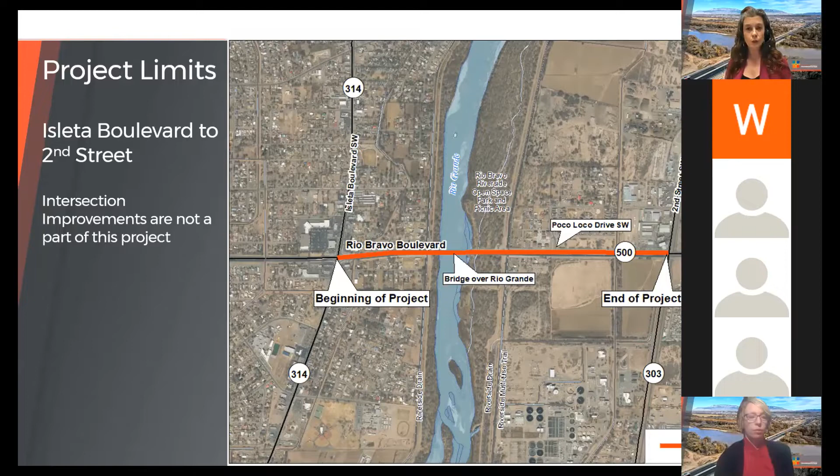The purpose of the project is to address the deficiencies of the aging bridge structure and improve travel along Rio Bravo Boulevard. The need arises because the eastbound bridge over the river is aged and in need of replacement. In addition, travel volume through the corridor is quite high, particularly during the evening and morning commutes.

There's also a need to look at traffic flow around the Poco Loco intersection, which is used as access for the riverside picnic and park areas. Additionally, the corridor's pedestrian and bicycle trails are not currently continuous, so part of our study looks at improving connectivity for recreational use as well as alternative commuting means.

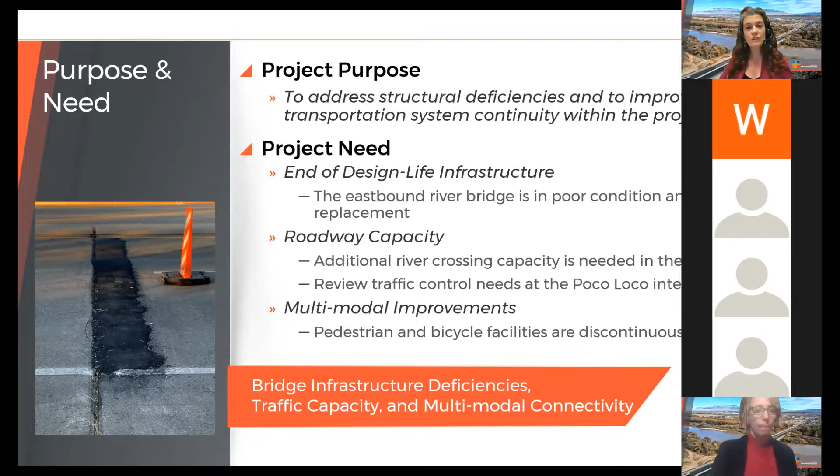Thank you, Jennifer, and hello everyone. Thanks for joining us this evening. As Jennifer mentioned, I will be discussing the emergency repair that occurred earlier this year.

Last year about this time, one of the NMDOT bridge inspectors discovered a bump on the bridge deck that led to an emergency inspection of the eastbound Rio Bravo over Rio Grande Bridge. It was discovered that the bridge pier was in need of immediate repairs. Traffic closures were put in place to remove loads from the bridge until the repair could occur.

During the repair, while work was occurring under the bridge, the eastbound bridge had to be closed to traffic completely because sections were lifted off the pier. Since this was an emergency situation, the project had to move forward as quickly as possible.

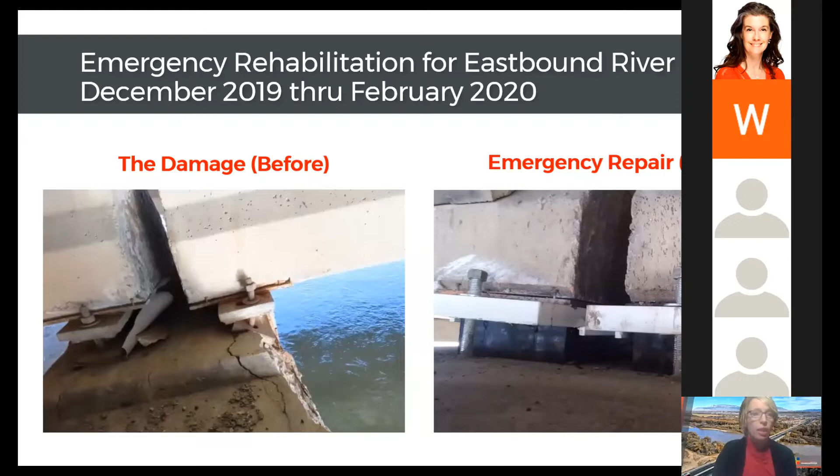In contrast to the emergency repair project, the upcoming project we are discussing here today had been in the planning stages since before the emergency. Funding had been programmed in the statewide transportation plan in early 2018. This project is not in response to an emergency or failure, but is being carried out to address the end of overall lifespan of the bridge.

We know that this is a critical river crossing for the area, and since we can plan for this project, maintaining traffic flow will be a key project consideration. You will see orange barrels and there will be traffic impacts, but we will not be closing the bridge for the entire duration of the construction project.

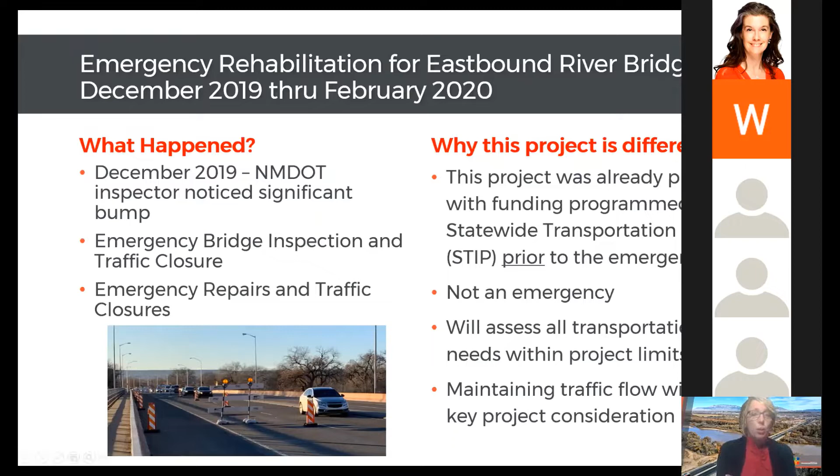We appreciate everyone's patience during the emergency repair and look forward to giving the public a new bridge to utilize for years to come. Now I'm going to hand this off to Megan Myers, the WSP project manager.

Within these project limits, there are several pieces of infrastructure that could be replaced or rehabilitated. First and foremost are the two parallel bridges which cross the Rio Grande. These bridges are about 1,400 feet long, with each bridge carrying one direction of traffic. Next are the Riverside Drain bridges, located about 50 feet to the east of the Rio Grande bridges along Rio Bravo, also with one bridge carrying each direction of traffic. Lastly, we have two culverts under Rio Bravo, just to the west of the Rio Grande bridges.

There's a corrugated metal pipe culvert that carries the Riverside Drain on the west side of the Rio Grande. And next to that, there is a concrete box culvert which spans an access path along the Riverside Drain.

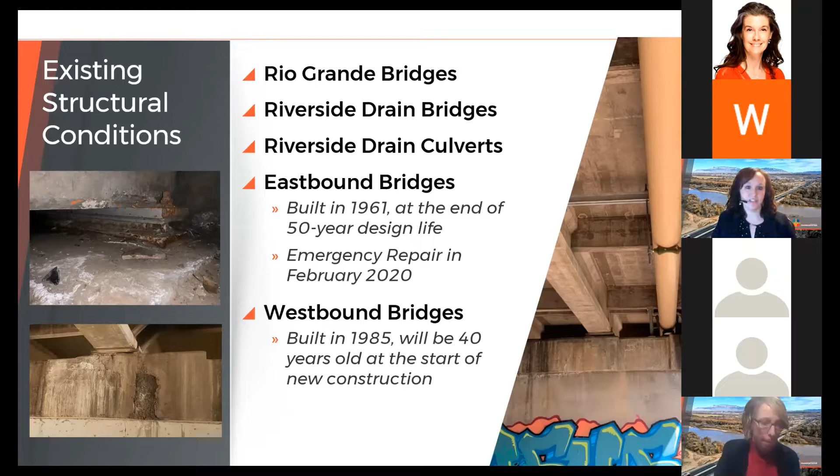The Rio Grande bridges were the main focus for this project initially, and particularly the eastbound bridge, which had the emergency repair that you just heard about. This bridge and the eastbound Riverside Drain bridge were built in 1961, meaning they are both at the end of their 50-year design life. The westbound Rio Grande Bridge and Riverside Drain Bridge were built in 1985 and will therefore be within 10 years of their design life at the time of construction for this project as well.

The existing roadway along the Rio Grande bridges consists of 4 12-foot lanes, 2 in each direction, a 6-foot wide raised median between directions of traffic, 10-foot shoulders on the outsides of the lanes, and a separated sidewalk along the southern side of the bridge.

The parallel bridges at this location almost appear as if they are one bridge, but they are separated by a small 1-inch wide joint.

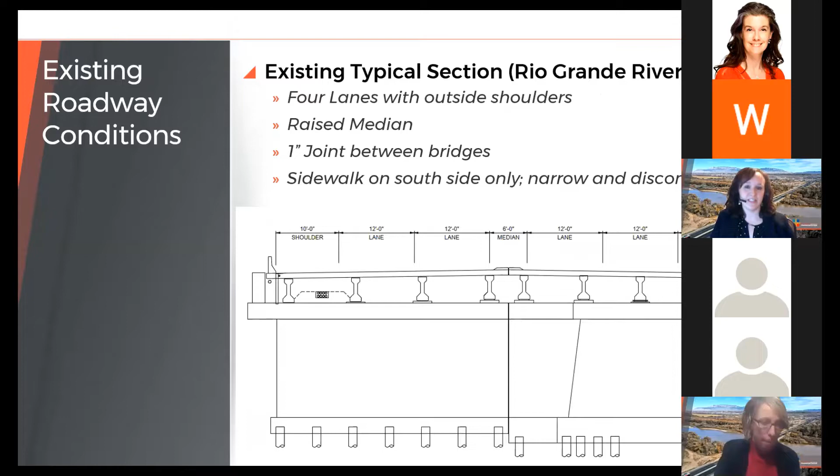In addition to the bridge and culvert crossings, there are several other aspects of this corridor that are being taken into account throughout the design and construction of this project. There are multiple utilities that cross the river and drains and are supported on the bridges. These include gas, fiber optic communications, electric, and water lines.

As I mentioned before, there are riverside drains that run parallel to the river on both the east and west sides. Also along the river are public recreational areas, including a picnic area, fishing pier, and trail along the east side of the river. And lastly, there is lighting along both sides of the bridges and the corridor, which will need to be maintained.

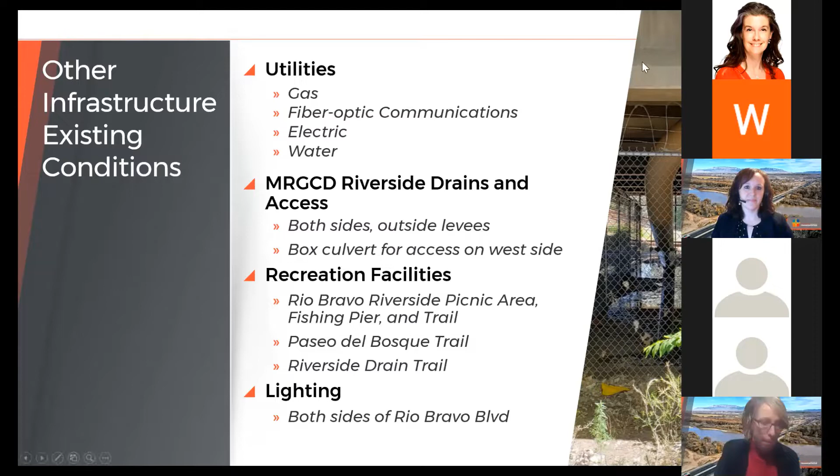River crossings in Albuquerque are obviously critical for transportation between the west and east sides of the city and county. Existing vehicular, pedestrian, and bicycle traffic within the project area are all important considerations. Currently, this river crossing serves more than 30,000 vehicles per day.

The NMDOT has improved Rio Bravo Boulevard from Prince Street to I-25, and Bernalillo County is in the process of improving the 2nd Street intersection to connect to those NMDOT improvements. This means the Rio Bravo corridor will be widened to 6 lanes from 2nd Street to I-25 to the east of the project we're discussing today.

This project is taking into consideration transportation needs from the Isleta intersection to the county's project at 2nd Street to provide continuity of travel and much needed river crossing capacity in the Rio Bravo corridor. To effectively maintain traffic during construction, the project team will be applying lessons learned from the emergency repair project to determine how traffic flow can be properly maintained during construction. We understand how important this will be to the surrounding community and the users of this corridor.

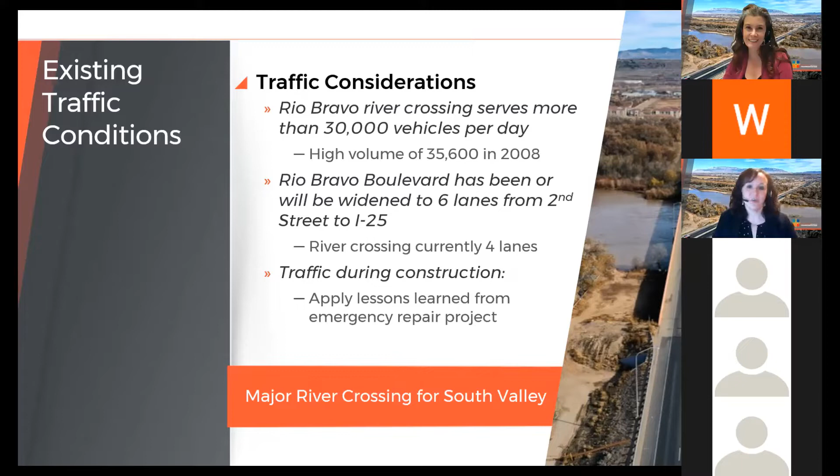In addition to vehicular traffic, there are several multimodal facilities within the project limits, some of which are substandard or not well connected, and some of which could be improved with this project. The Paseo del Bosque Trail on the east side of the river is used by bicyclists and pedestrians, but our data shows that most trail users biking or hiking south on this trail turn around when reaching the north side of Rio Bravo, and only about 10% continue south under Rio Bravo.

There is a proposed trail along the Atrisco Riverside Drain on the west side of the river, and this project will need to accommodate that underpass crossing as well. As mentioned before, there is a narrow sidewalk along the south side of the bridges, which does not currently connect to any sidewalk along the approach roadway. And there is a trail on the south side of the corridor from Dean Drive to 2nd Street, which continues east to I-25. Lastly, existing shoulders on Rio Bravo are sometimes used for bicycle travel.

The current conditions of the Poco Loco Dean Drive intersection with Rio Bravo will also be investigated as part of this project to determine if there is a need for additional controls, which could possibly include a traffic signal.

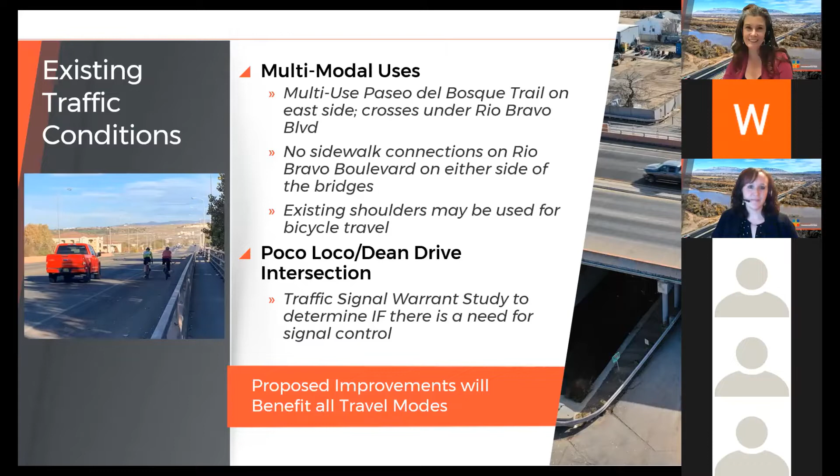The existing Rio Grande floodplain conditions are obviously a huge governing factor in the design of this project. One of the strictest requirements the project team is working under is the need to maintain the water level within the river after the new or rehabilitated bridges have been constructed. No permanent rise in the water level caused by this construction is allowed in this stretch of the river.

Running along both sides of the river is a levee system maintained by the Army Corps of Engineers. The design requirements for this levee system will be thoroughly reviewed as part of the study and design process to assure that the project designs do not compromise the levees in this area. Also, the proposed bridge components in and over the water will be designed so that impacts to the open water channel are minimized.

Throughout the study and design of this project, coordination with regulatory agencies and other stakeholders will be critical to assuring all parties' interests and assets are being considered. The agencies we are coordinating with include the Army Corps of Engineers, MRGCD, the Bureau of Reclamation, Bernalillo County, Interstate Stream Commission, and the U.S. Fish and Wildlife Service.

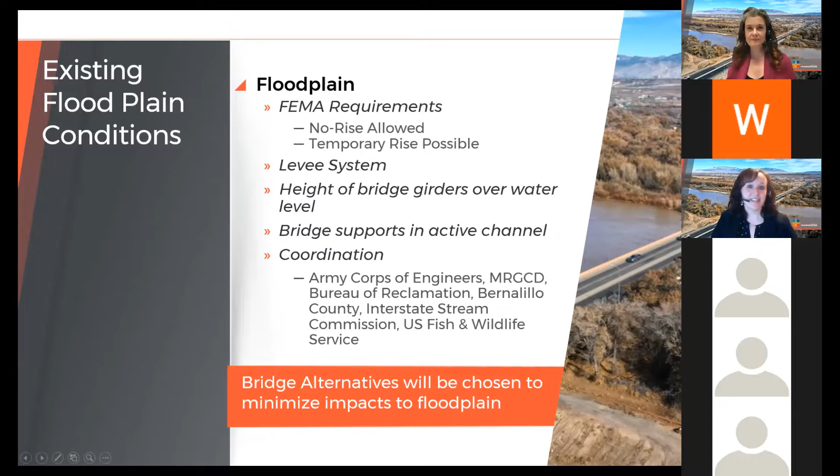Thank you, Megan. As Megan mentioned, we have been coordinating with multiple agencies and stakeholders who manage resources and land in and around the road and bridge corridor. Part of that coordination has included understanding what environmental resources and considerations that we should be aware of as part of the New Mexico 500 Rio Bravo Bridges Replacement Study. Using that information will help us find a solution that minimizes its impact on the human and natural environment as much as possible.

For this particular project, the environmental considerations and resources in and around the area include threatened and endangered species and those associated habitats, bat roosting and nesting birds, water resources including the Rio Grande, the floodplain that Megan talked about, as well as the irrigation ditches, cultural resources, existing noise levels and how noise levels may change as a result of the project and those associated potential impacts, visual resources, as well as potential impacts on recreation facilities, including the Riverside Recreational Park, as well as the associated trails.

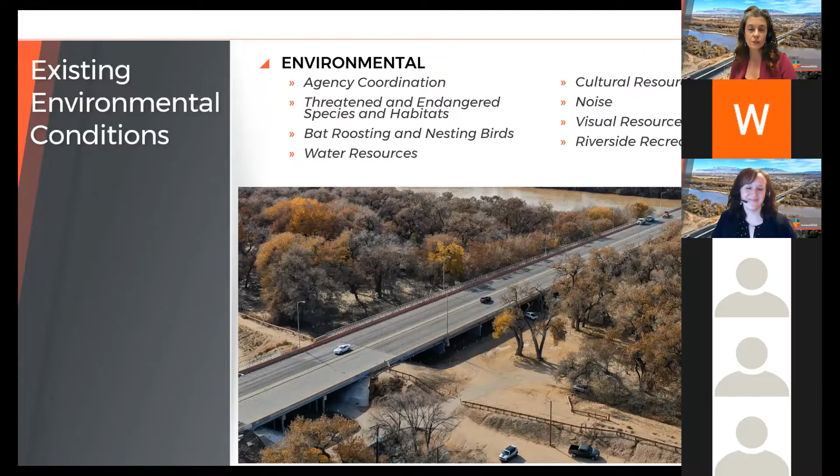Currently, environmental studies are underway as part of our study process, and the design will seek to minimize impacts to these environmental resources as we move forward with the study. Next, I'm going to introduce you to the NMDOT project development process and the project schedule.

Currently, we're in the early stages of the project. We're in the study phase. It's very early on. The NMDOT calls that stage phase 1AB. During the 1AB study phase, the DOT establishes why we are planning on making improvements and why they're needed. Understanding and gathering that data so that way solutions and potential solutions can be developed and identified to then look to see how those different solutions may be affected by the existing conditions within the corridor.

As part of that study process, it includes us talking to the public and the area stakeholders to get that input and to share our information to help us continue developing the project. As the study progresses, we end up developing a variety of different alternatives that are then evaluated, and eventually the goal is to arrive at a preferred alternative that advances into the environmental processing and into the preliminary design, which eventually will then be that preferred alternative that becomes that which is constructed.

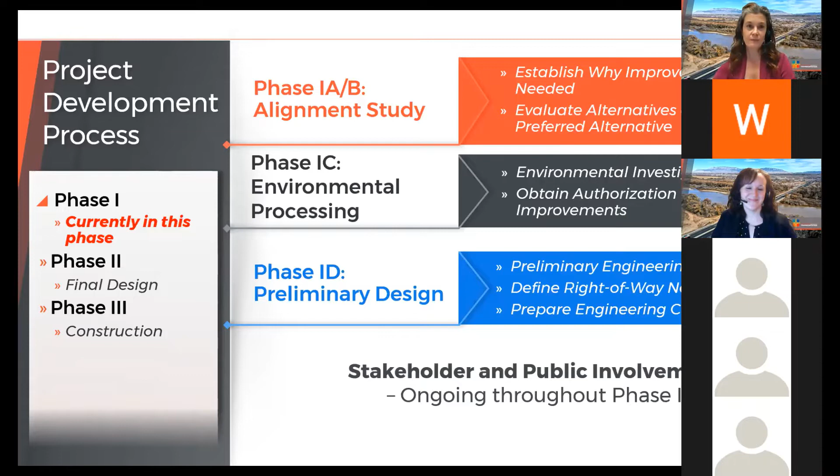As part of the study phase, we collect a variety of different data to understand how those different factors and features within the corridor can affect and constrain the development of alternatives. We look at right-of-way needs, environmental considerations, community concerns, available funding, agency input, traffic access, and geotechnical constraints. That range of factors allows NMDOT to develop a solution that is balanced and meets the project purpose and need.

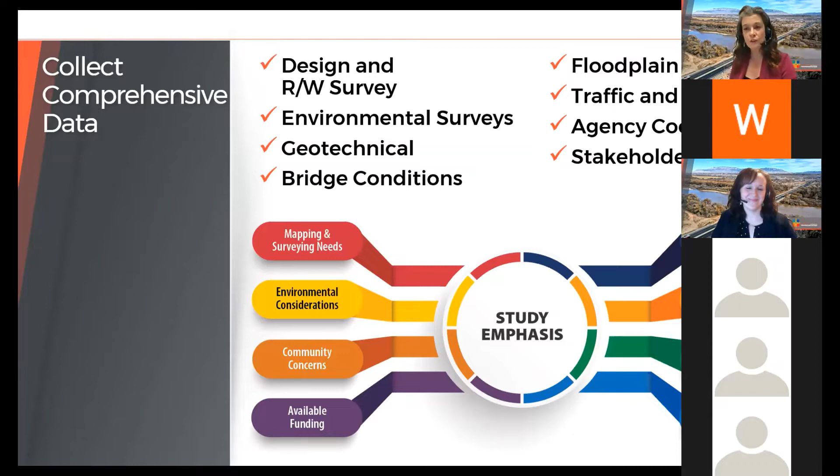Next, I will talk about the schedule for the project. We started this study earlier this year in the spring of 2020. We've continued to collect data on existing conditions and develop some conceptual plans, which is what we're presenting to you this evening. We're having the public meeting with you now, and we will be seeking to gather input from the community this evening and after tonight's event. We hope you send us your questions and comments. This will help us advance the project, as we are planning on completing the study in spring of 2021.

Once we wrap up the study, we will have a preferred alternative that will move into initial engineering design development, environmental analysis, and documentation. Right now, we're figuring roughly 2 to 3 years to finalize the engineering design before we get ready to go to construction. Construction is currently programmed for 2024.

However, as we move forward with the study and the project, the district will look at other funding opportunities that may allow the project to advance to construction sooner. Right now, there's over $25 million allotted from the Federal Highway Administration for this project, and DOT will be looking to add more money to make it successful.

First, this project will provide additional traffic capacity within the project limits. ADA accessible sidewalks will also be provided, as will pedestrian continuity not currently available at this location. The bridges will either be rehabilitated or replaced to bring them up to code and improve safety. Improvements to trail access will be incorporated, as will accommodations for bicycles. Lastly, overall connectivity to adjacent roads around the project area will be maintained or improved to provide a smooth traveling experience for users of this corridor.

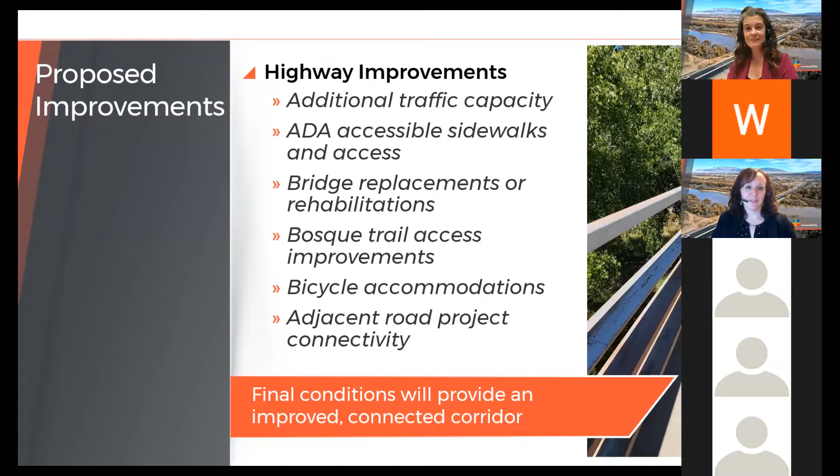The final width of the reconstructed bridges and approach roadway will be wide enough to accommodate 3 lanes of traffic in each direction, though initially the corridor may still be striped to maintain the current 4-lane configuration until widening to 6 lanes along the entire corridor is possible. We are expecting to provide a raised median similar to the existing one, and outside shoulders will be maintained as well. In addition to a widened sidewalk along the south side of the bridges, the possibility of providing a sidewalk on the north side will be investigated.

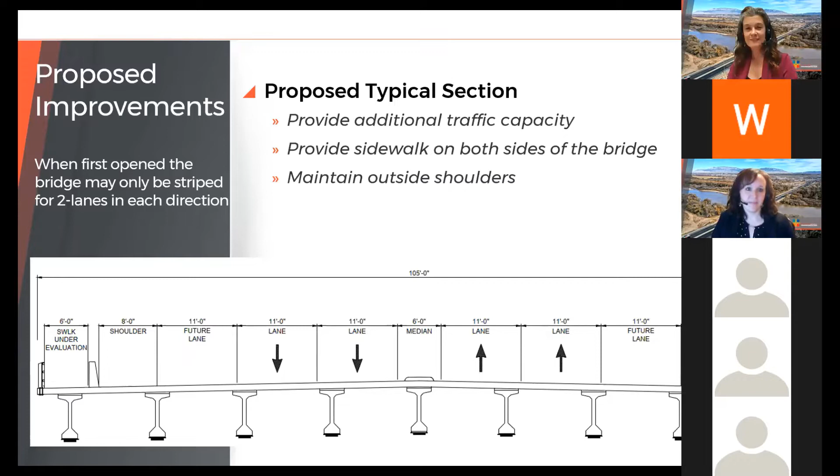And now I will pass things off to Nathaniel Miller with WSP to discuss the bridge alignment alternatives being evaluated as part of this project.

Thank you, Megan, and hello everyone. My name is Nathaniel Miller, and I'm one of the project engineers working on this study. I'm going to walk us through the alignment alternatives we're currently considering, and then I'll go through how we compare these alignments against each other to identify the preferred alternative.

As Jennifer alluded to before, we're just in the study phase. The most critical end result of the study phase is to identify the alignment that we'll use in final design. The way this works is you first develop a bunch of alignments, and really you throw them against the wall and see what sticks.

Some of the ideas you weed out as having fatal issues, and the rest you flesh out until you understand the impacts of each, and then you compare them against each other.

In a study, one of the options you're required to consider is actually doing nothing, which we call the no-build alternative. You do this to have a reference point to compare other alternatives against, but also in some ways to justify the project. For this project, doing nothing is not acceptable. The eastbound bridge required that emergency repair in the winter and is nearly 60 years old on a 50-year design life, so doing nothing is not acceptable.

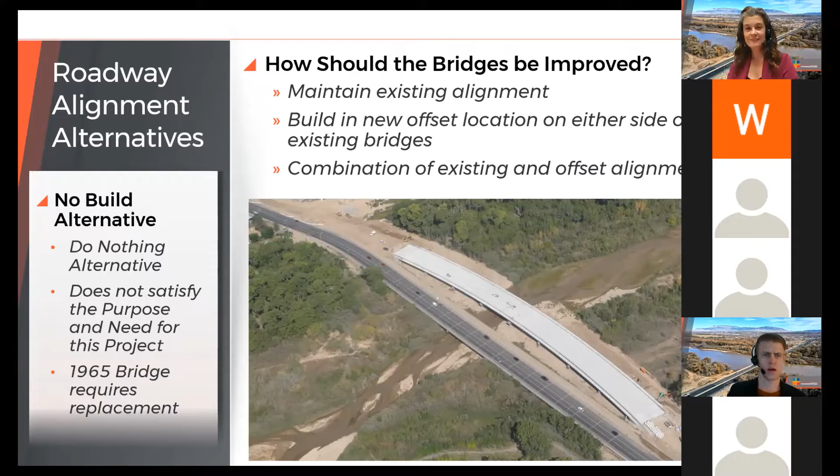Now I'll go through the alignments. Again, the project is from Isleta all the way to 2nd Street, but the alignment alternatives are the same along the roadway, except at the bridge location, which is where they differ. Most of the project complexity and expense is at the bridges, which is where we'll focus now.

We have several alternatives that we'll present. The first several are alignments that would reuse the existing alignment, alternatives 1 and 2. These may seem like the most obvious solutions, just put the bridge back where it is today, but actually they introduce the most complexity and cost, as we'll see in a minute. The second group of alternatives are brand new alignments, and we also have alignments that are partially offset from existing. And again, we want to emphasize every alignment has phasing to maintain traffic during construction.

So alternative 1 would only replace the eastbound bridge, which is to the south and in the hatch on this picture. This is the only bridge that definitely requires replacement at this time. The complication with this option is the strict floodplain requirements that Megan referenced.

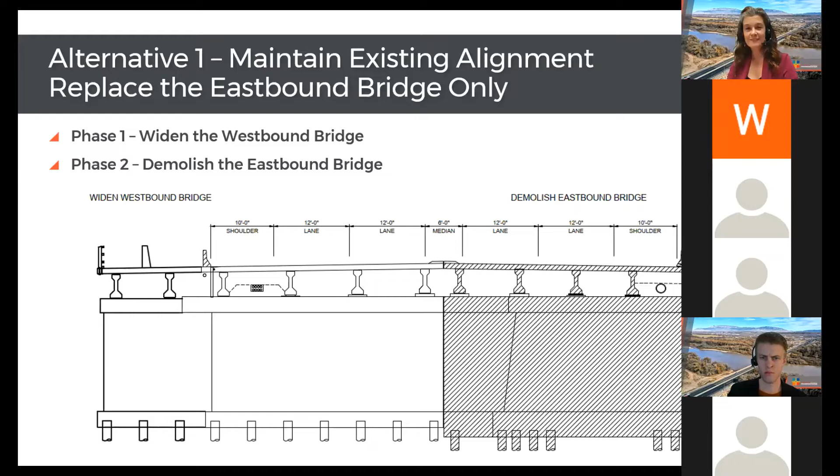Because of these requirements, we would have to line up the proposed replacement piers with the existing piers, which will remain in place. The existing bridges are built on a very large number of steel elements, which are buried in the river, and replacing the piers in the same location would introduce significant complexity and geometric constraints in avoiding this huge number of elements in the river.

Additionally, this option would leave the westbound bridge in place, which is 40 years old at the time of this new construction. So in another 15 or 20 years, this bridge would still require its own replacement project and result in a long-term cost noticeably higher than if we just replace all the bridges with this first project.

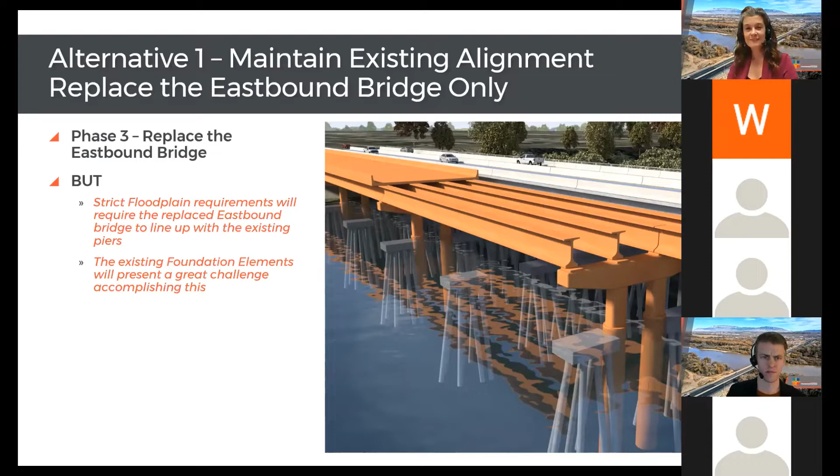The remaining alternatives all replace all the bridges with this one project, which would eliminate those foundation issues by allowing us to put piers in new locations.

Alternative 2 would put the bridges back in the same alignment. The disadvantage of this option is that it requires the most construction and traffic phasing of any alternative in order to put the alignment back where it is today, while maintaining traffic. As a result, we expect this to be the most expensive of our alignment alternatives and have the longest construction duration.

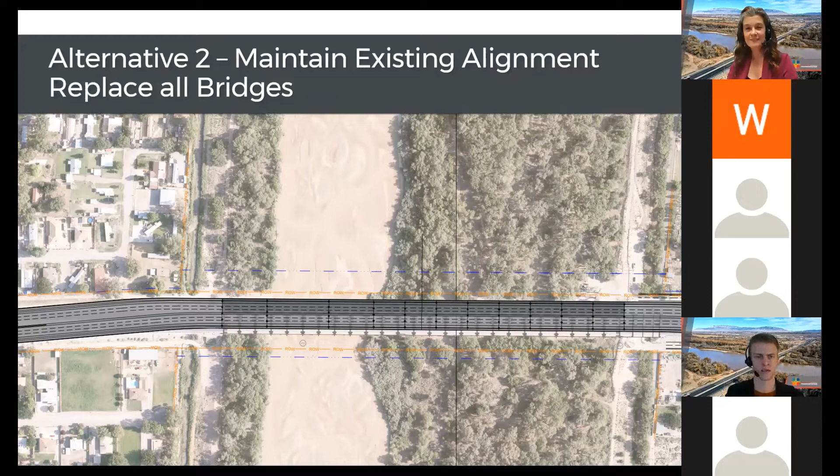The next two alignments are both new alignments. Alternative 3 is a new alignment to the north. The advantage of a new alignment is you can construct the entire bridge first before you really start impacting existing traffic. That separated construction is also very good for the contractor. It allows them to very efficiently construct the new bridge without a lot of phasing or needing to cycle in workers and equipment over and over.

Because of this efficiency, we actually expect this to be the least expensive alternative, to have the shortest construction duration, and be one of the best options for maintaining traffic and minimizing disruptions during construction. The disadvantage of this option is that it has the largest property impacts to the north and the most impact to the bosque habitat and the Rio Bravo picnic area.

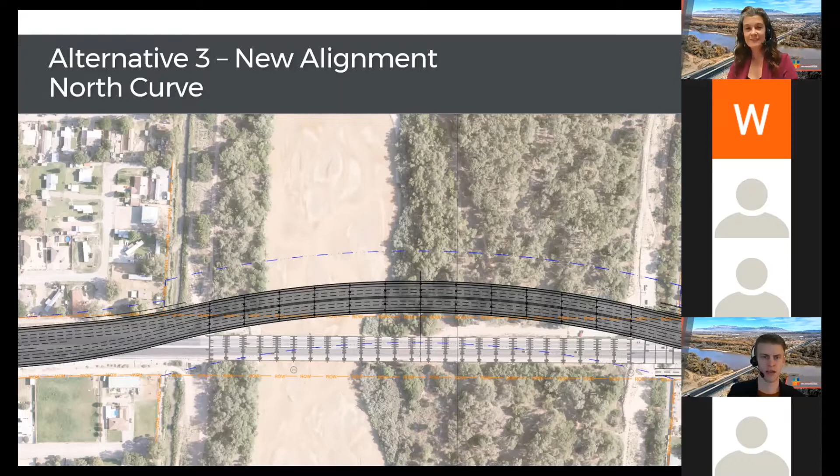Alternative 4 is also a new alignment, but it balances the disadvantage of alternative 3 by splitting the traffic on new bridges to the north and to the south. The result is that we have lesser total impact to the north, but now we have property and environmental impacts on both the north and the south.

This alternative has most of the advantages of alternative 3 with separated construction, but it also has a few major disadvantages. And the biggest one is that the existing bridge would have to be demolished after the new bridges have been constructed and boxed in that old bridge. This would result in a lot of added complexity and undesirable traffic situations. So the last three alignments that we're going to go through balance the pros and cons of the last alternatives.

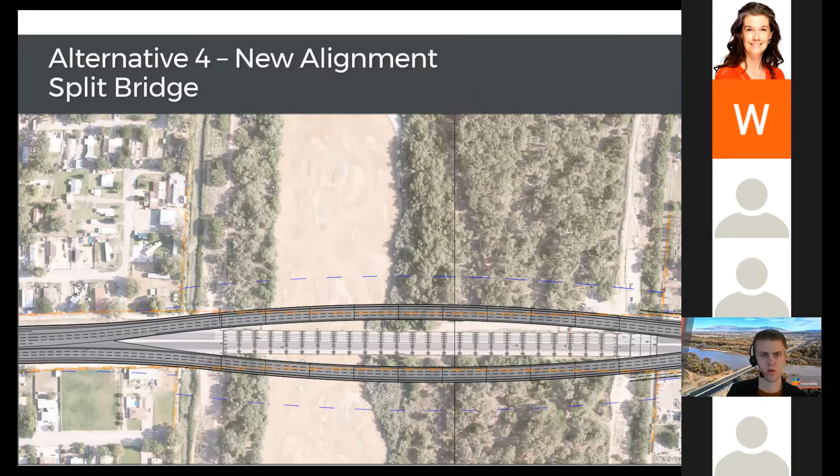They balance the pros and cons of using the existing alignment or going with a brand new alignment. All of these next alternatives build half a bridge first to the side of the existing alignment. We would then move traffic to this new half bridge, demolish the old bridge, and then widen the new bridge to its final condition.

Alternative 5 would place this partially offset alignment to the north. Alternative 6 would also place it to the north, but on a straight alignment, which changes where your impacts are. A curved alignment reduces the impact to adjacent properties, but a straight alignment reduces the environmental impact and reduces construction complexity by providing a straight bridge, which is simpler to build.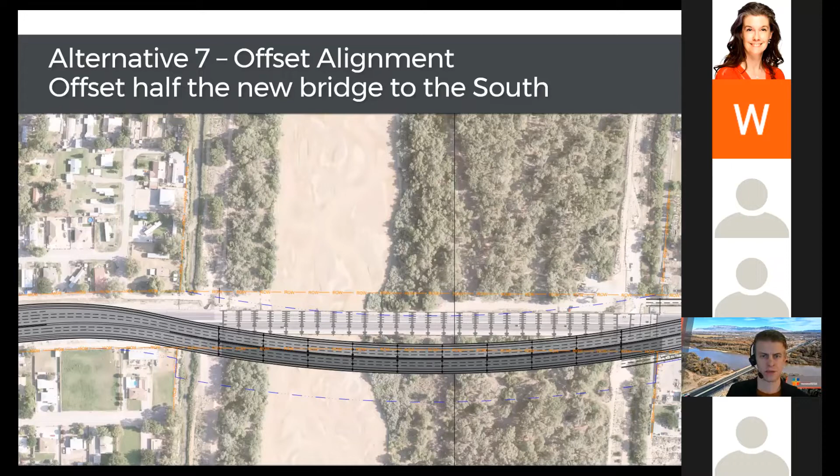Our last alternative, alternative 7, curves to the south, which greatly reduces impacts to the Rio Bravo picnic area, which is to the north. But the alignment has worse geometry curving to the south, and there is worse construction access for this option, particularly at the southwest corner. So those are the options. That's what we're currently considering. That's where we are today.

Now I'm going to briefly go over how we're comparing these alternatives against each other to identify the preferred alignment that we take to final design.

The list here are the criteria that we are currently using to evaluate the alternatives. We consider how each alignment impacts each one of these considerations, including construction cost, how constructible each is, the environmental impacts, the impacts to properties, how each alignment is able to maintain traffic during construction, how it impacts utility phasing, pedestrians and bicyclists, the river, and the ability to maintain the bridges in the future.

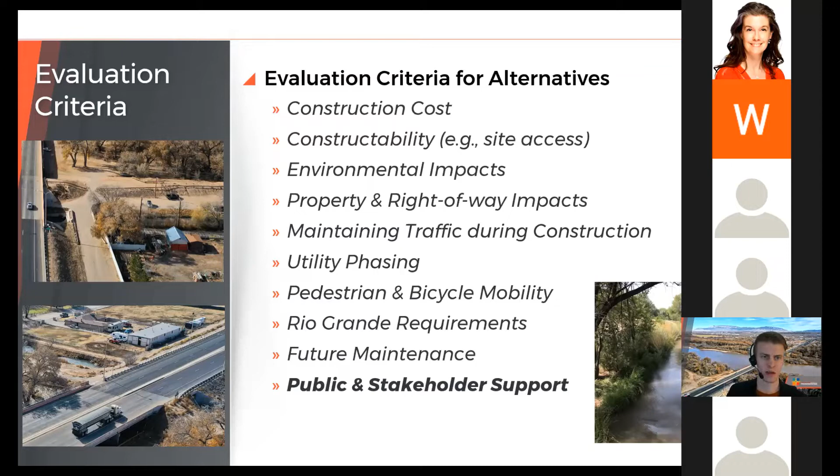The last consideration is why we're here today, to get your input and stakeholder input, and that will be applied to our alternatives comparison as we finalize the preferred alternative.

We work closely with the New Mexico DOT to determine priorities to weight each of these considerations, but initially we just look at the total set of advantages and disadvantages to understand things at this early stage, and then we slowly eliminate alternatives to arrive at a preferred option.

And that's where we are today, on the later end of this process, waiting to receive public and stakeholder input, and then we'll work on finalizing that evaluation and selecting the preferred alignment.

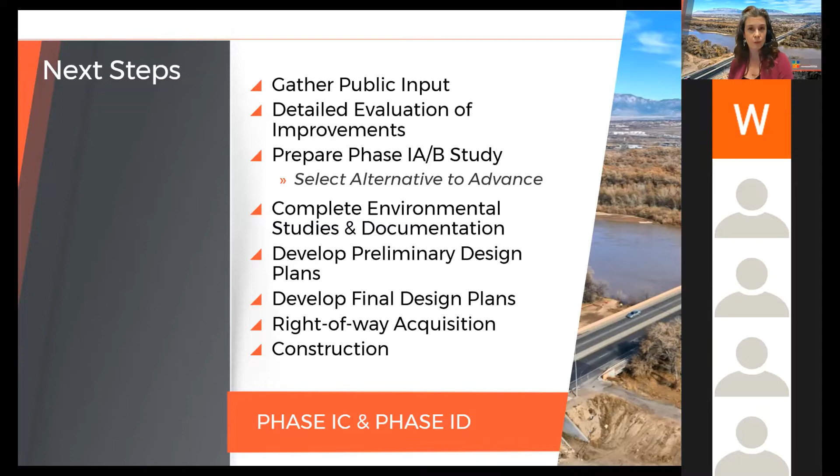The result of that final report will be the selection of a final alternative to advance forward into completion of environmental studies and documentation, as well as development of preliminary design plans. Once we've developed those preliminary designs, we'll go into final design, identify the right-of-way that needs to be acquired as part of the project, and then eventually move on to constructing and letting the project.

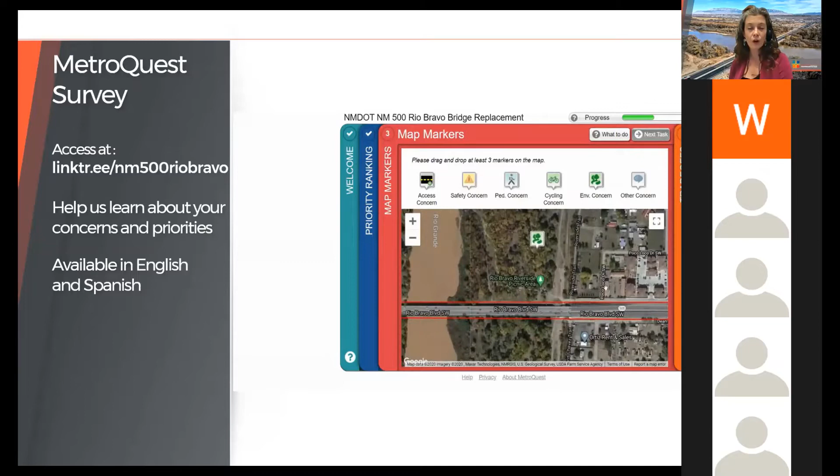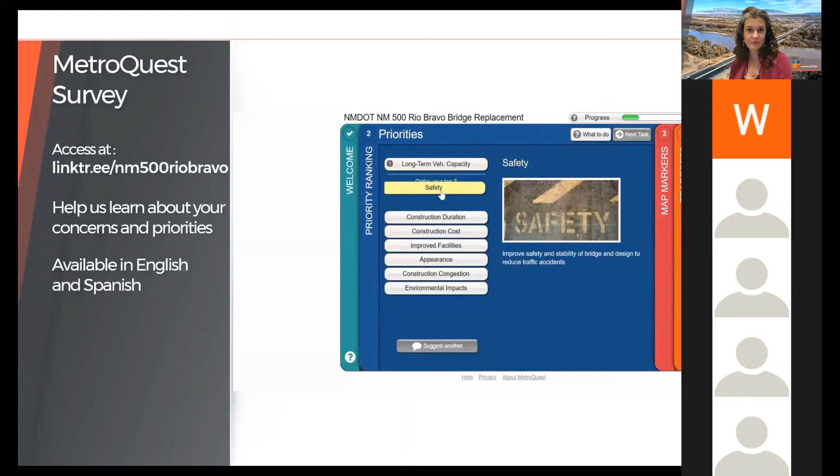With that, we're going to start our question and answer session. To get us started, I'll begin with one of the common questions. We've already been receiving lots of phone calls and emails, and I'm excited everyone has been sending fantastic questions. The common question we've been receiving is: will the bridge be closed during construction, similar to the emergency repairs that happened earlier this year?

That's a great question. The answer is, the bridge is not going to be completely closed like the emergency repairs. That was an entirely different project, and traffic will remain flowing during construction of the bridges.

I'll let Priscilla Benavides answer that question with more elaboration. Thank you, Jennifer. We will be doing our due diligence to accommodate traffic in both directions. As stated previously, this is an entirely separate project from the emergency - this is not an emergency, this is a well planned out project. So we're able to spend time really considering planning and designing to accommodate all modes of transportation. Again, the bridge will not be closed down. Thank you.